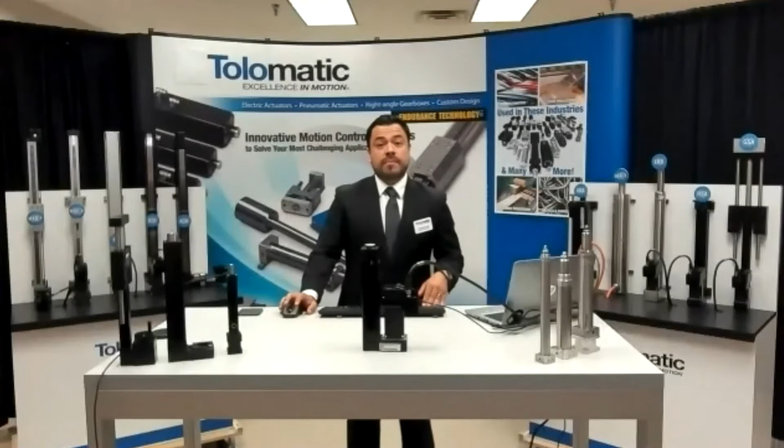Today we'll be presenting our Tolomatic Demo Studio. As you know very well by now, this sales environment is the toughest we've seen in decades. As sales or technical people, visiting a client in person, seeing an application live, looking at a machine running physically are all very essential components to understand the customer's needs.

In the last months, unfortunately, these options have not been available to us very often. Visiting a client in person nowadays is very challenging and sometimes not even allowed because of their policies. And the result of this is that business can suffer. The sales cycle increases, communication doesn't flow the same way, etc. And for this reason, we've had to rely on technology to keep us all connected.

This is taken from a book called Virtual Selling. It says, even though we know that an in-person meeting is more effective, the efficiency you gain by shifting initial meetings to video calls more than makes up for not being there face-to-face. You'll be able to meet with and qualify more prospects, resulting in bigger pipeline and more sales. Those are very true words.

And what a better way to do this than with a properly set up environment that you can utilize for this purpose. Being that a lot of our business is now done virtually—training sessions, webinars, presentations online—that's all we know nowadays. At Tolomatic, we understand the need to connect with your clients in a better way, and that's why we want you to put our demo studio to work.

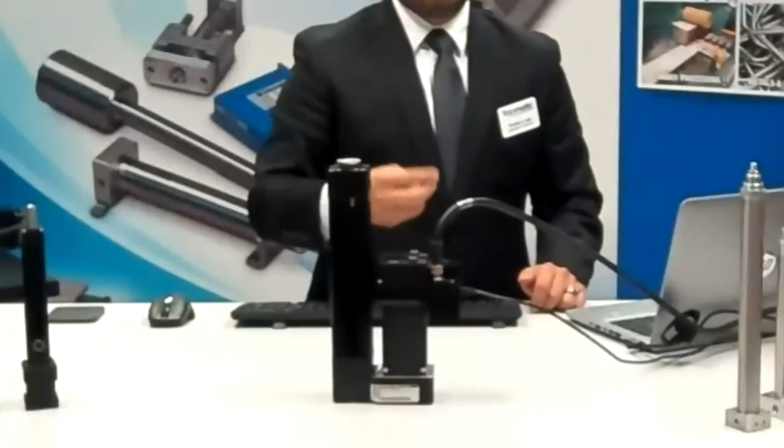This drive can allow you to communicate in different ways with a PLC. It could be done via Ethernet IP, Profinet, Modbus TCP, or EtherCAT. Besides that, you could also control it with analog or digital inputs, sending commands from a simple button, a PLC, an HMI, etc. This is connected to our RSA actuator, our rod style actuator, one of our most famous actuators we sell. So how would you show this to your customer? I'm going to start sharing my screen.

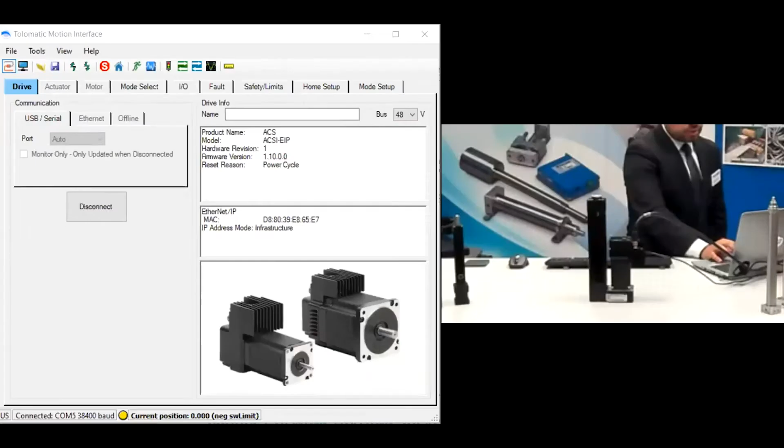We have a way to control this called Tolomatic Motion Interface. So your customer, once we have set up a meeting with you and your customer, should be able to control this via the Zoom meeting. So remotely, they can start moving all the different characteristics of this software.

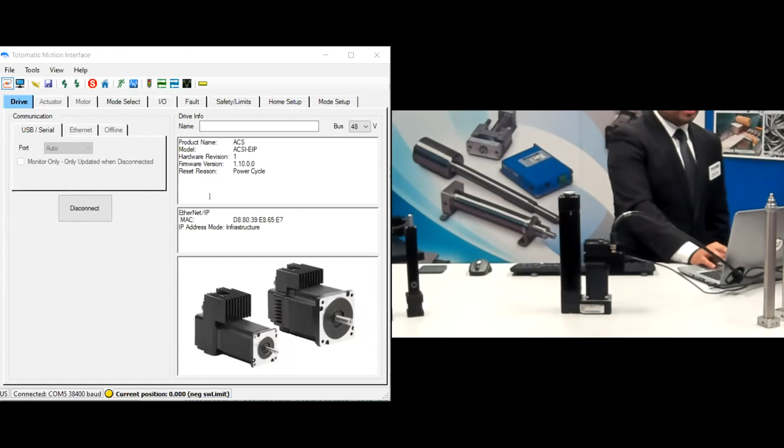For example, they would be able to connect, see what type of actuator and motor we have here. They should also be able to move within tabs so they can start configuring all the features of this actuator.

For example, in this case, we have an RSA actuator, size 24, with a solid nut 0.4. It has a 6-inch stroke length. It's mounted in a reverse parallel way, meaning the actuator is on this side and the reverse parallel goes to the motor, and everything is connected via a belt. It also has one of our ACSI motors, which is a NEMA 23 with an incremental encoder.

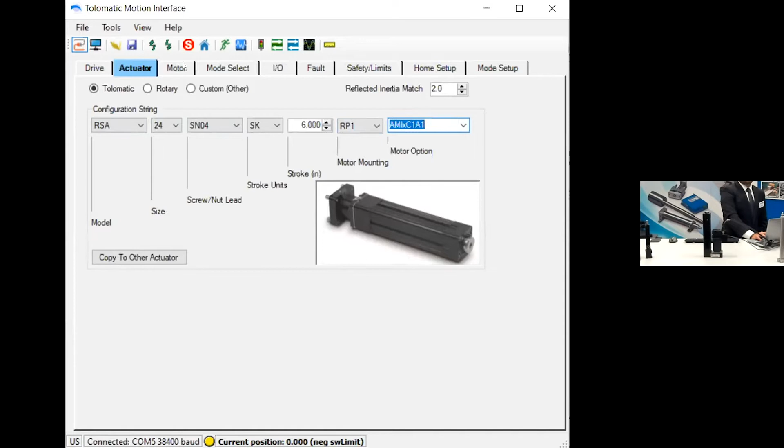Once we go through these steps, your customer will be able to see how easy it is to program one of our units. They can program index moves, an analog position move via 0 to 10 volts or 4 to 20 milliamps, or control it in a pneumatic way if they're replacing another pneumatic unit, using the same signals from an electrovalve. Instead of reprogramming all the PLC, they could use the same signals and just send 24-volt inputs to our drive. Or they can do it via a communication protocol, like Ethernet IP, Modbus TCP, Profinet, or EtherCAT.

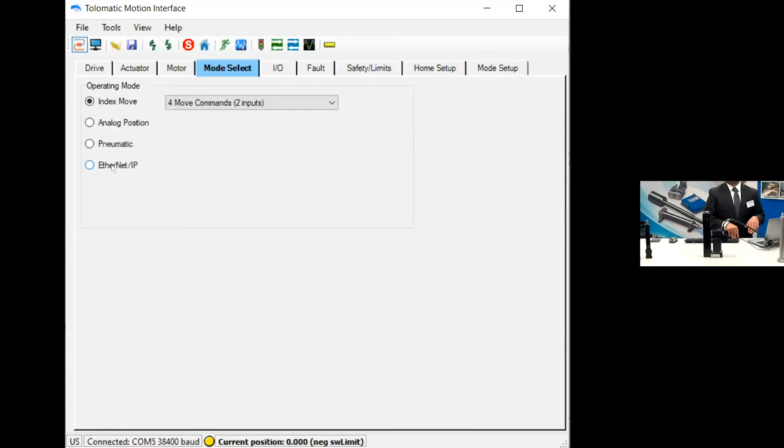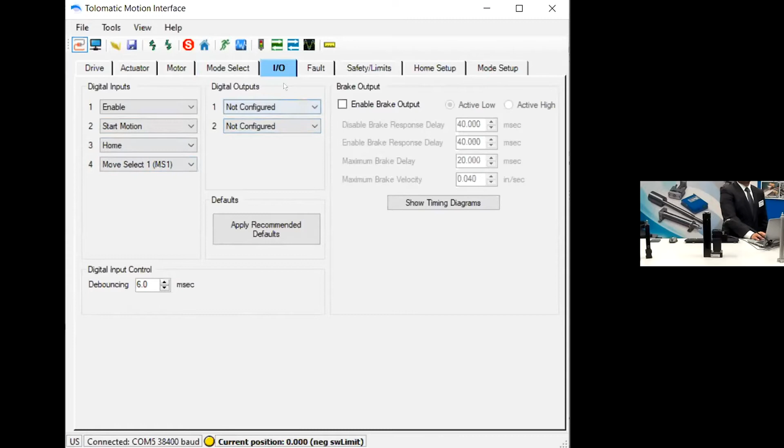In this case, for this example, we're just going to be doing our input and output index move. But you can define different inputs in this drive, like software stop, stop motion, limit switches, etc. These four inputs are what we're going to define today, just as an example. You can also set your fault values, what to do in case you get a position error, like stop motion, disable the motor, etc.

Then in our safety limits tab, you are able to define the tolerances in position criteria, a following error, the motion limits in terms of speed and acceleration, and your current limits. What is the peak current maximum, the continuous current maximum, and how long do you want the drive to stay in those values to throw or trigger a fault.

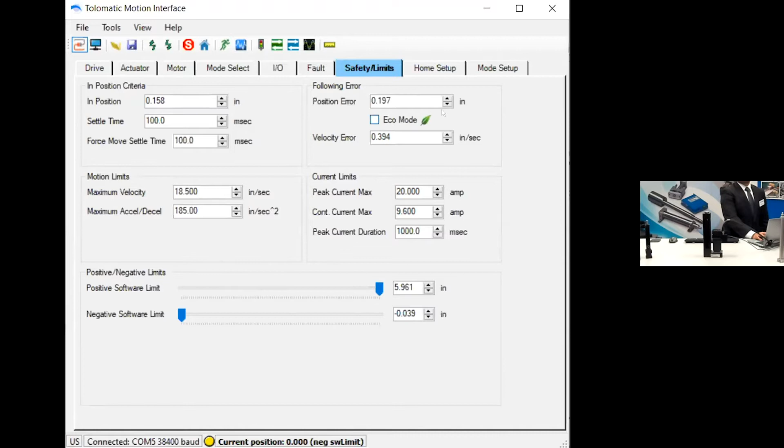Also, you can control the positive and negative limits of position. You can set up your home routine.

In this case, please take a look at this. When we press home, the actuator will go towards the end of stroke, and once it does that via this tab right here. The routine as of now is set up as a 0.5 inch per second speed towards the home. It has a 1 inch per second towards the offset, acceleration, deceleration, and offset, and the force.

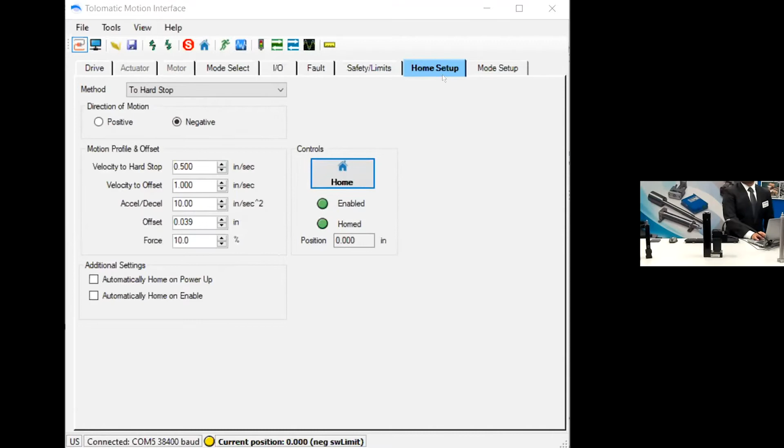And then, this is the most interesting tab, I would say. In this tab, you can show your customer that with an electric actuator, you're actually able to control different variables compared to a hydraulic or pneumatic product. In this case, we can control position, velocity, acceleration, deceleration, and force. It is as simple as modifying these values right here. We can modify position, etc., and then that way the customer remotely should be able to start creating motion.

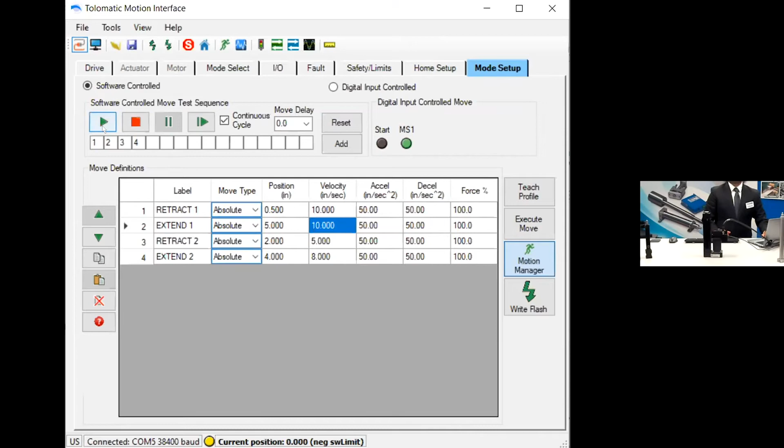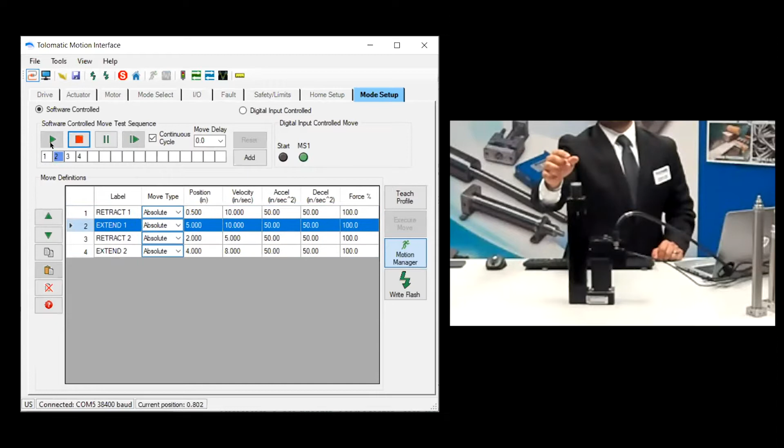In this case, compared to a pneumatic actuator that would have only 2 positions, an electric actuator is able to do different routines. As you can see, the extend goes to 5 inches with a certain velocity, acceleration, deceleration, but the way back can go slower, can go faster, whatever you prefer. So that's one of the main advantages of using an electric actuator. And it's way easier to show this to your customer by actually having them see it in a video, and not only that, but they were the ones that programmed it.

So this software is really, really simple to use. As you saw, we took probably a couple minutes right now in this example, but in real life it really takes about 5 minutes to do it. You can always rely on your Tolomatic support to do this, but it should be pretty simple. All right, so that's our ACSI motor drive combination with our RSA product.

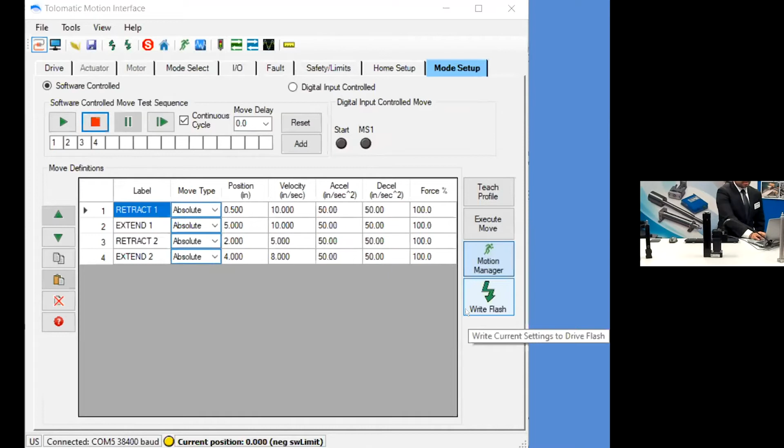So I also wanted to show you some of our other demos we have available right now. Now that you know that we have a studio and we can present stuff to your clients like this, what do we have available out there? If you go to our website, there's a section that will show all of this.

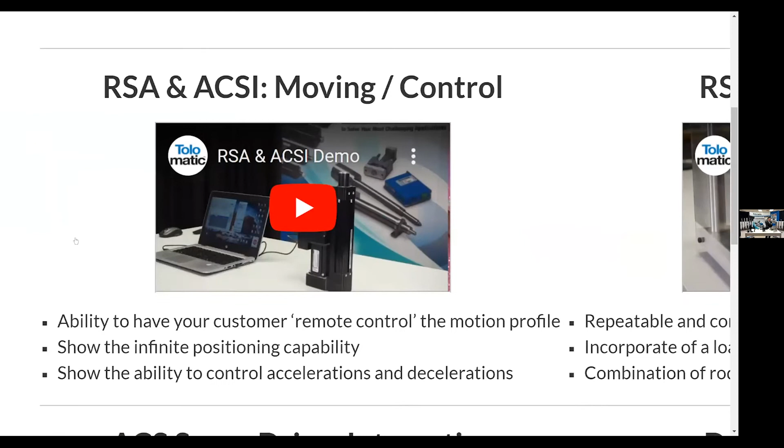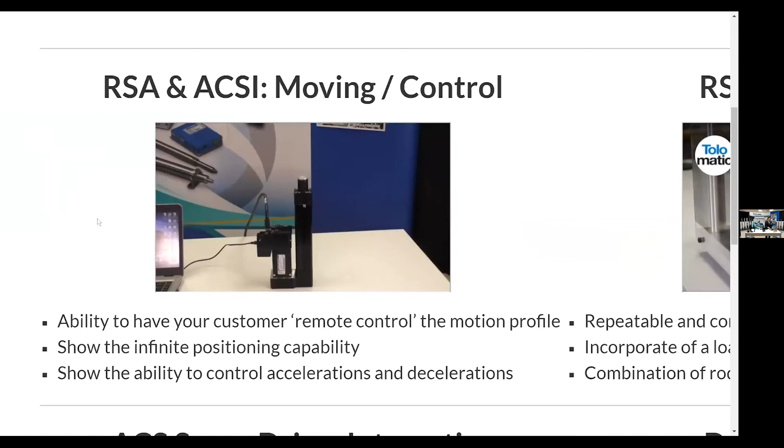In this case, you can select the one that I just showed you, which is our RSA with an ACSI. The main things to consider on this one is that you can do remote control. You can show infinite positioning to your clients, and you can show the ability to control accels, decels, force, etc.

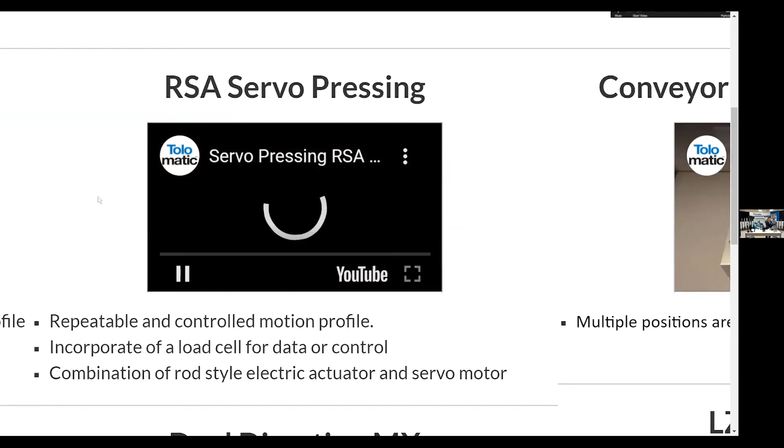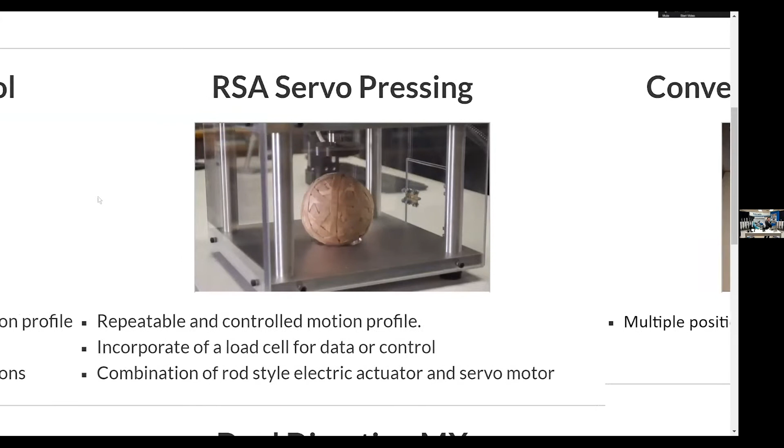We have other ones too. You can do an RSA servo pressing. This is a demo that we use to show how repeatable and how controlled the motion profile can be. A lot of clients have applications that they have to repeat within a certain percentage, 2 or 3% repeatability. And this demo shows that it gets to the same position every time, and not only that, but it also does it with the same force every time. Obviously it has a certain percentage of repeatability, but electric actuators are really good for that.

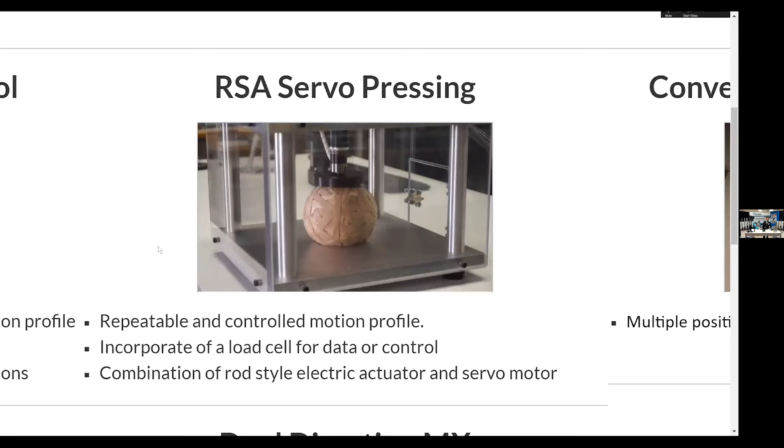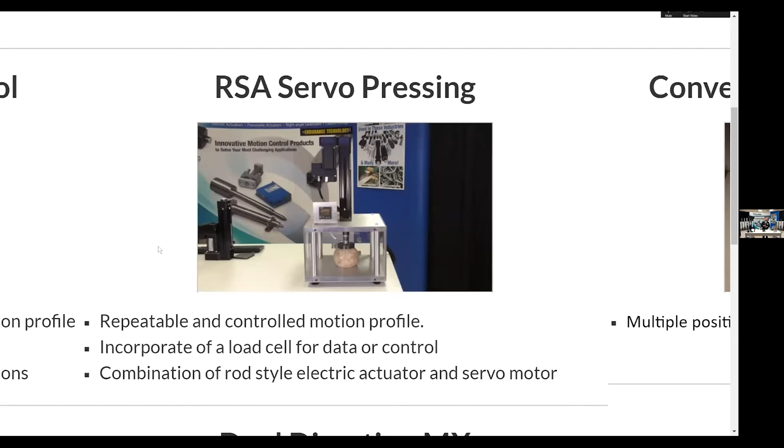Also, in this demo we actually included a load cell. This load cell gives an input to the drive that's used as a feedback to know how much force you're developing in the system. So this combination of the rod-style electric actuator and the servo motor is great for a lot of people.

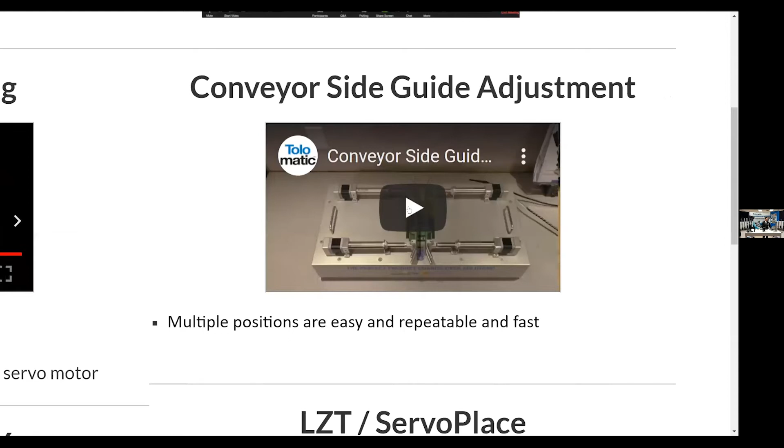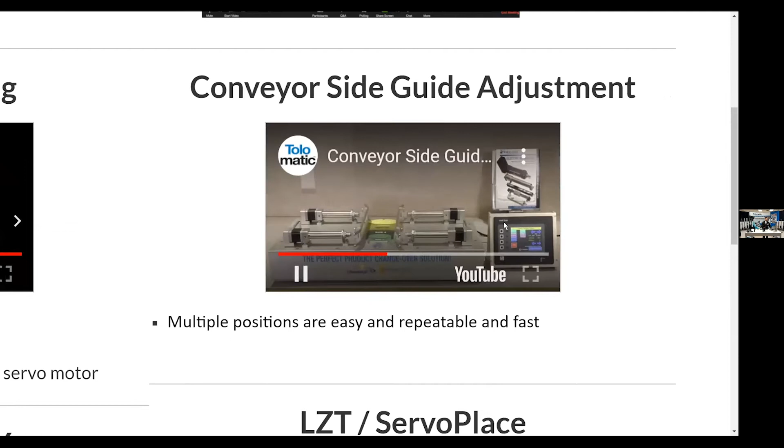All right, the other one we have is this pneumatic replacement actuator setup. Basically what this is doing is that 4 actuators are moving synchronously via signals sent to them by the HMI. This is all controlled via Modbus.

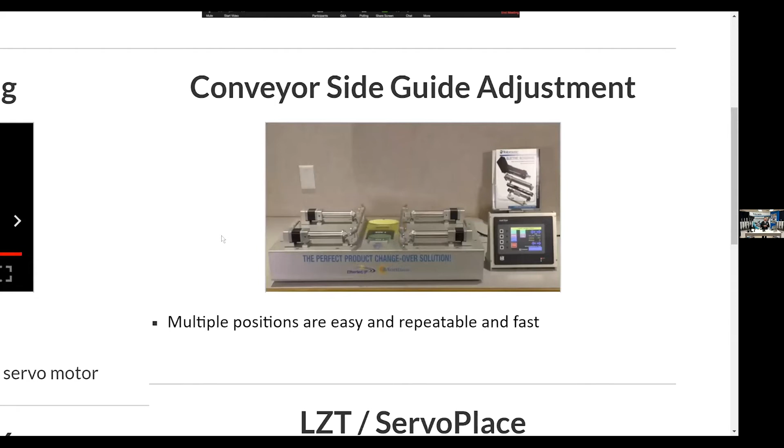The way it's done is we have predefined recipes for creating a motion profile that could be used in an industrial setup. The main use case we've seen is when people are trying to make changes in their production lines. For example, manufacturing companies spend a lot of hours on preventative and corrective maintenance because they need to adjust the conveyor for the size of the product they're manufacturing. With pneumatic actuators, that's pretty difficult to do because everything is mechanically done.

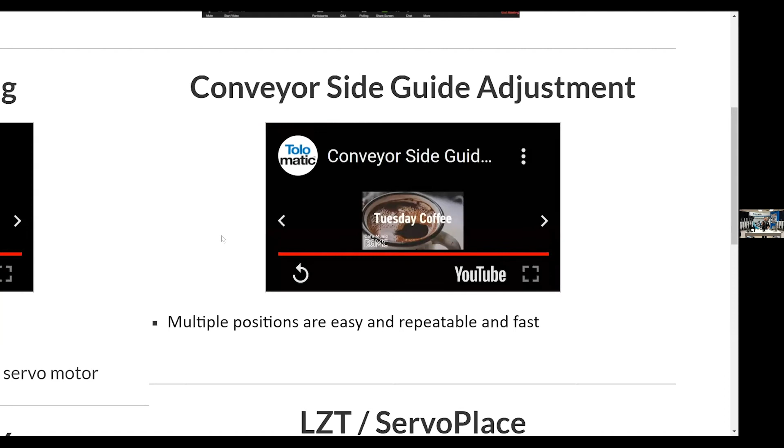With an electric actuator, you can just press a button, as you're seeing in the video, and it has a predefined recipe with the force, accelerations, etc. that you want, and that's pretty much what you need to do. So you eliminate downtimes, and the return on investment is pretty quick.

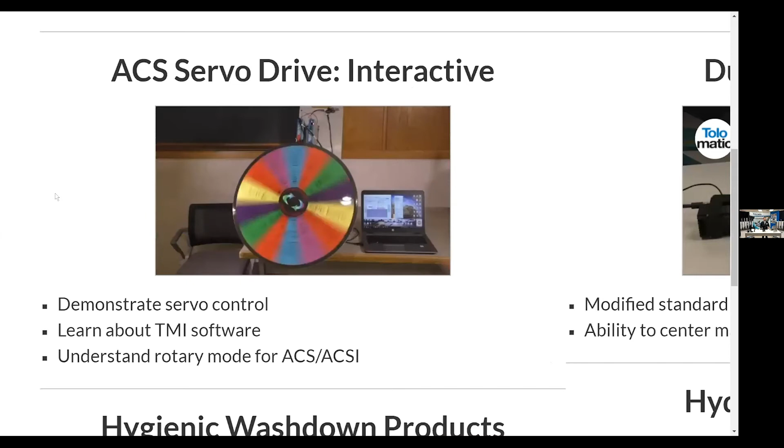We also have some fun ones. This one in particular is our ACS servo drive. What it's doing here, instead of controlling a linear position, it's actually controlling a rotational position. We also have that capability of doing degrees or revolutions. Well, this demo is basically just a wheel of fortune.

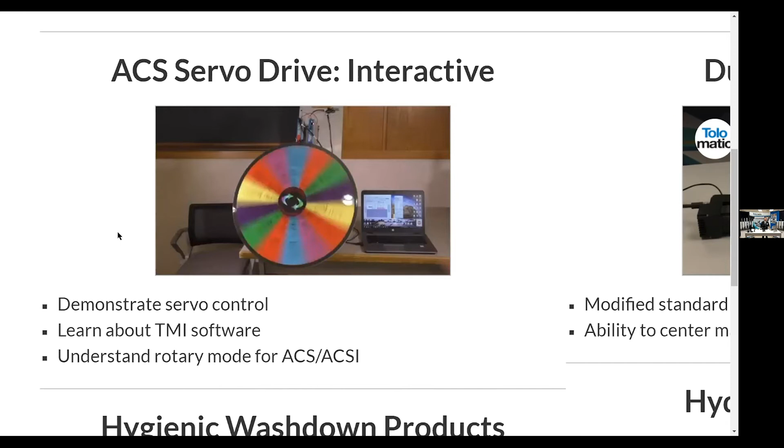So you select a random number of degrees, and it rotates into a position that gives you a certain prize. It could be Tolomatic gear or whatever — we can define that when it comes to the time. But basically it's to show the capability of the ACS drives to be controlled via a rotary mode. So yeah, this is a real wheel of fortune. If you wanted to schedule a meeting with your clients, they will actually get real prizes. So that's one of them.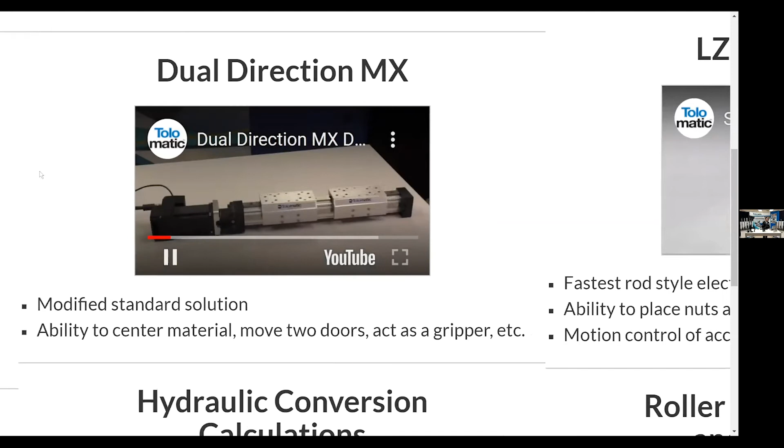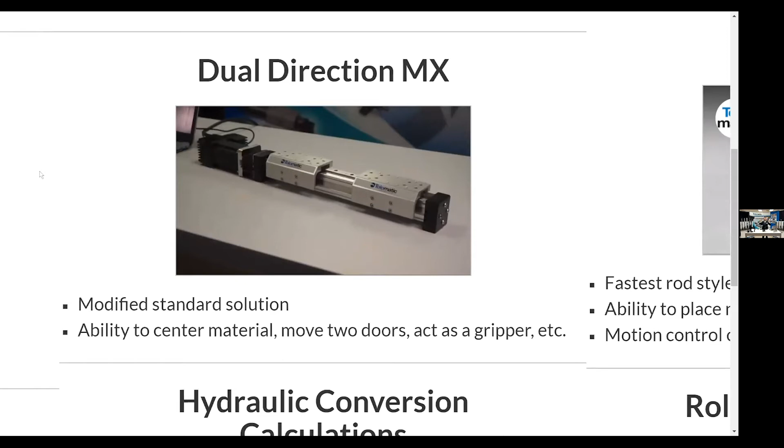We also have this dual direction MX. A lot of people find it really interesting. What it's doing here is using 2 screws — well, it's the same screw, but with different threads. One is a left thread and the other is a right thread, and they're joined in the middle. When the screw is rotated, one of the carriers goes to one side and the other goes in the opposite direction. So with the same motor, you can control 2 carriers at the same time, and they act as a mirror.

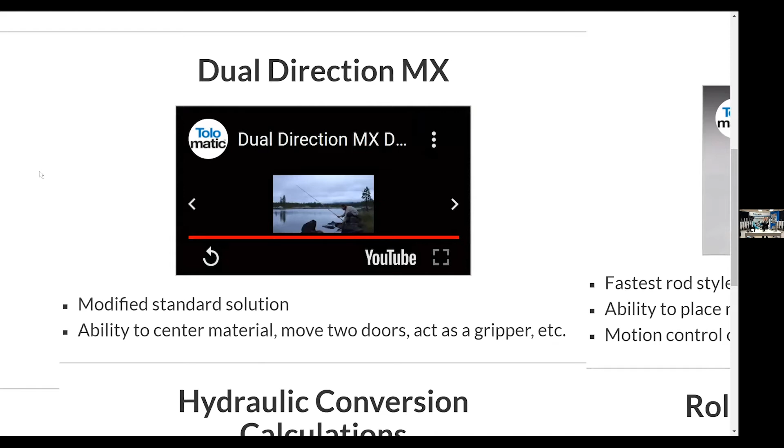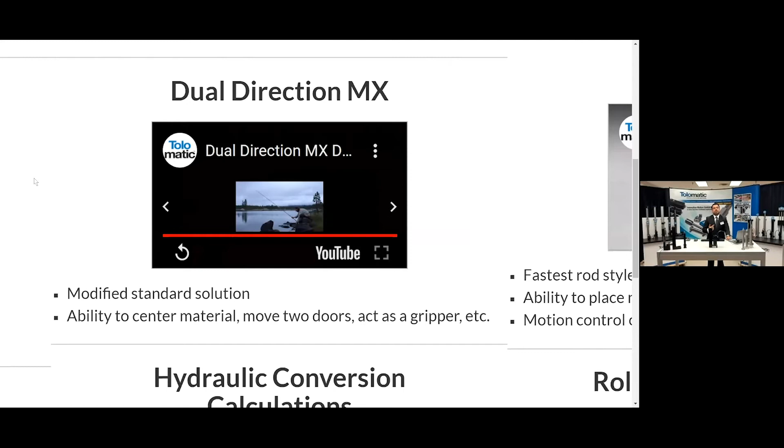That's used a lot in gripping applications, for example when you want to grip something like this and then transport it to another location. This is a really good demo to show that kind of capability. These are used in pick and place, and in operations that need to press or compress something — you name it. There are many applications.

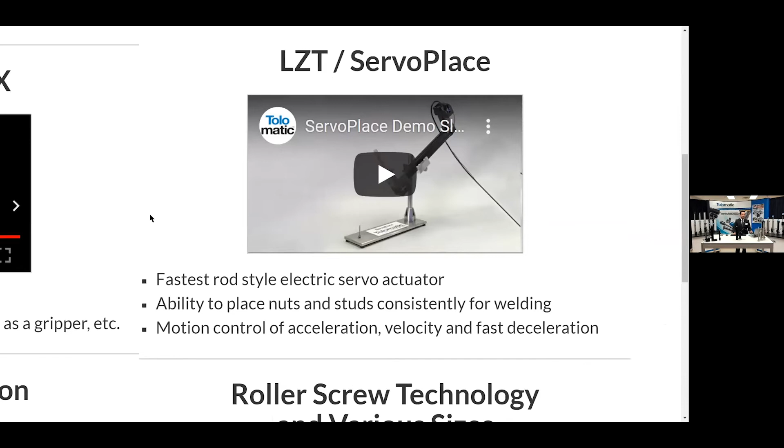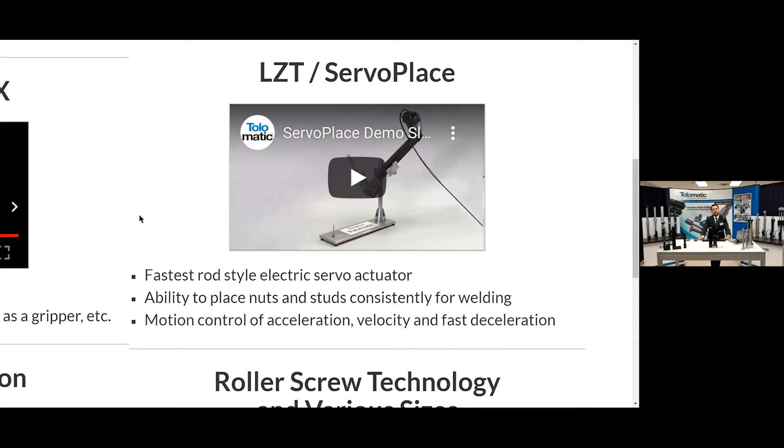This is our LZT, or ServoPlace — definitely our fastest rod-style actuator out there. These can move up to 200 inches per second, or 5 meters per second. This is a combination between a belt-driven actuator and a rod-style actuator, which isn't very common to hear. Instead of rotating a screw, we're actually controlling the movement of the rod with a belt, and that's what gives us more speed capability.

This, in particular, was designed to place nuts for a welding application in the automotive industry, but we've seen other projects that might get good use of this. As you can see in the video, it moves extremely fast — we needed to slow it down so you could see the rod moving. But it's been pretty interesting for a lot of customers.

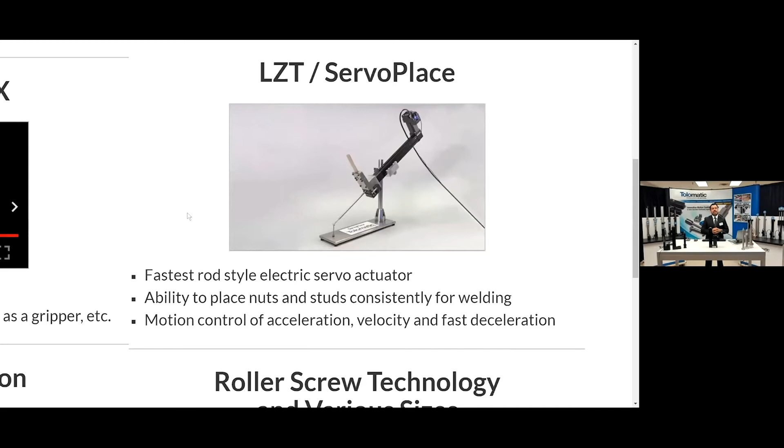The main reason is this was also done pneumatically back in the day, and it's still being done pneumatically in many places. But the problem with pneumatics is that you have different pressures in the lines, and by having these variations you don't get to the same position every time, or not at the rate you'd like — there are variations of pressure and velocity, etc.

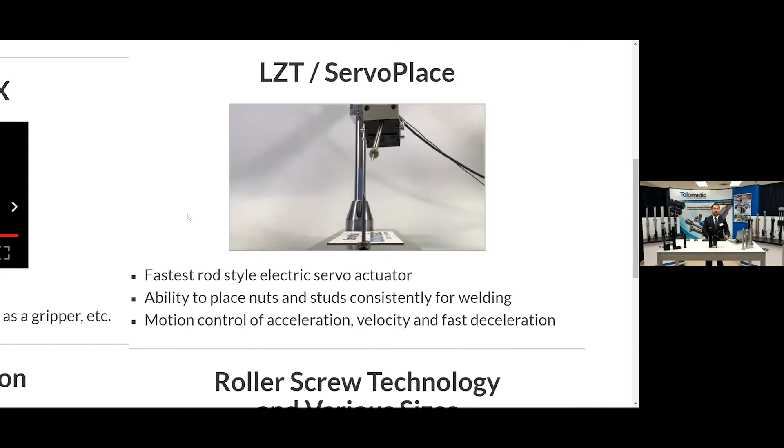So those nuts that you see the rod placing were all over the floor, meaning operators needed to clean them up. That's downtime an automotive company cannot afford — stopping for 1 hour in that type of industry is a lot of money. So we don't drop any nuts with this thing. It gets to the same position every time, locates it where it needs to go, and does it very efficiently. So we can show that to your customers as well.

We have our hygienic washdown products with water and movement. In the last decades, there wasn't really any hygienic solution out there other than pneumatic — because hydraulic is not hygienic, right?

It uses oil to operate, so oil is not hygienic at all. Nobody wants their food with hydraulic fluid in it. So pneumatic was the best approach before, but the problem is you have all the losses of efficiency because you have leaks of air, etc.

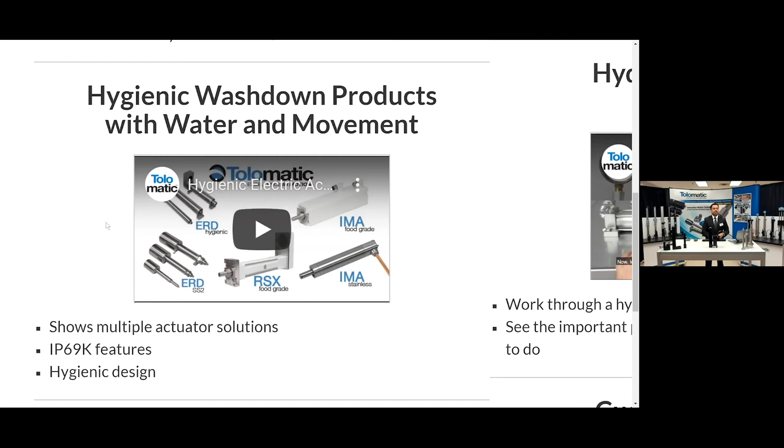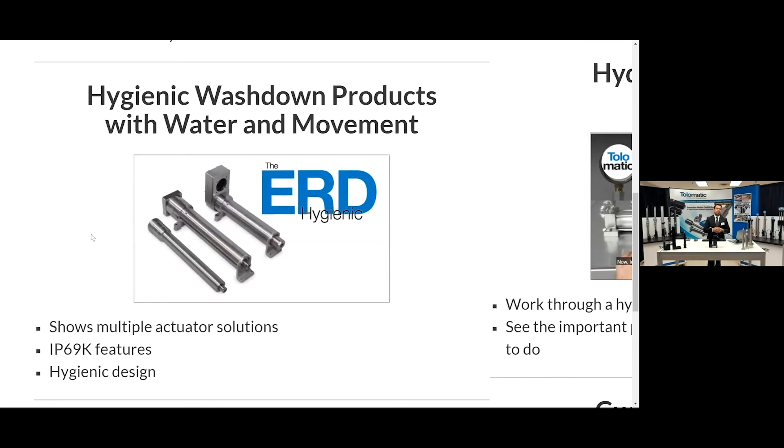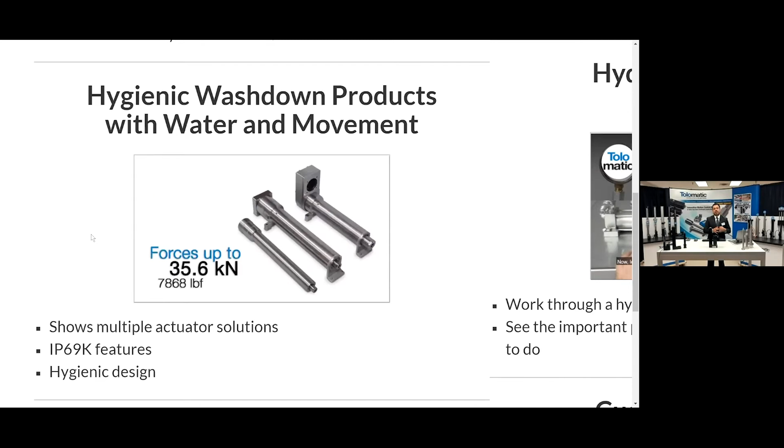So we heard that from our customers, and we designed a bunch of actuators that are actually hygienic. These actuators can be either stainless steel or have a white epoxy paint, so you're able to clean them inside and have a really hygienic operation. They're rated, some of them at IP69K, which means you can power wash them at high temperatures, high pressures, statically, and they would withstand the ingress.

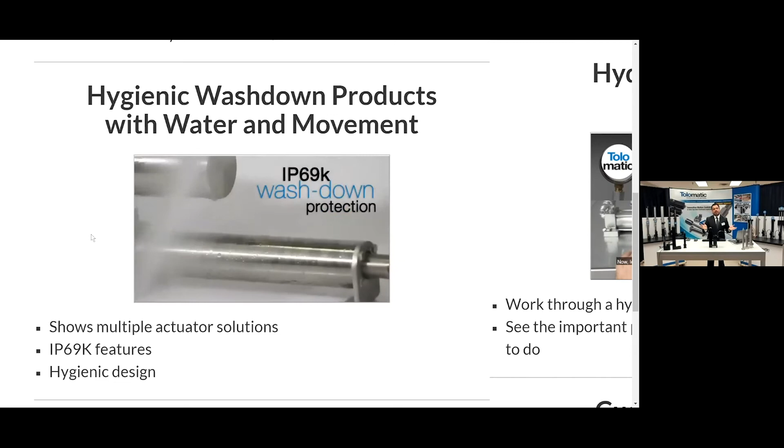So as you can see in that video, you can wash them and they will not get water inside of them. Besides that, they could also have the lubrication that is special for food and beverage or pharmaceutical. We can also include one of our motors in the back.

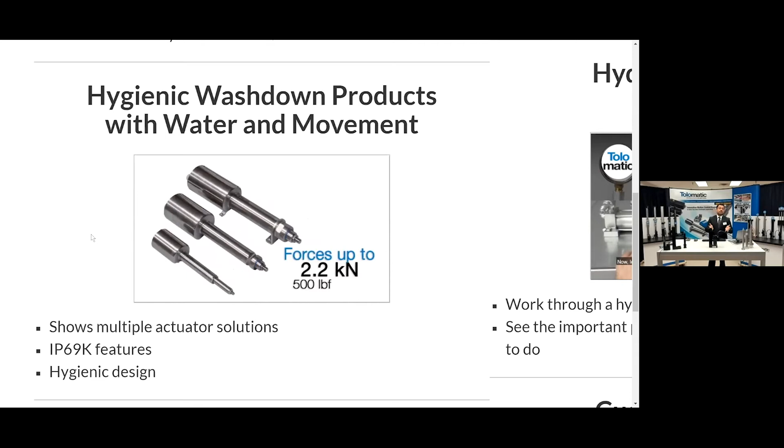So those NEMA 17 or NEMA 23 motors in the back could be servo motors or stepper motors, and they're all surrounded by this can that it's also rated IP69K. So you have the whole solution and then just a cable that goes to the drive, and that drive can be put somewhere else in your control panel.

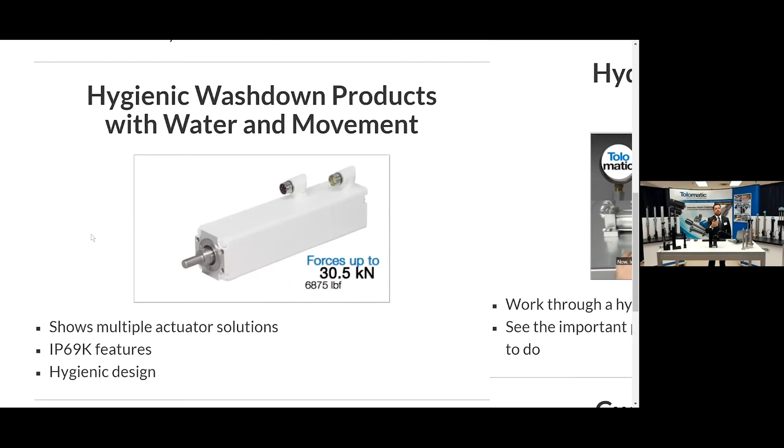Also, this IMA has the motor integrated into it. The motor is in the first 30%, probably in the back, and then the remainder is just the mechanical piece. So you can have this solution with the motor integrated, and it has this white epoxy paint, so it remains hygienic enough.

And this one, that no one else in the world has, Tolomatic is the only one that offers this. It's an integrated motor into the actuator as well, but it's also IP69K, and it's all made of stainless steel. So this is our IMA stainless steel, pretty cool product.

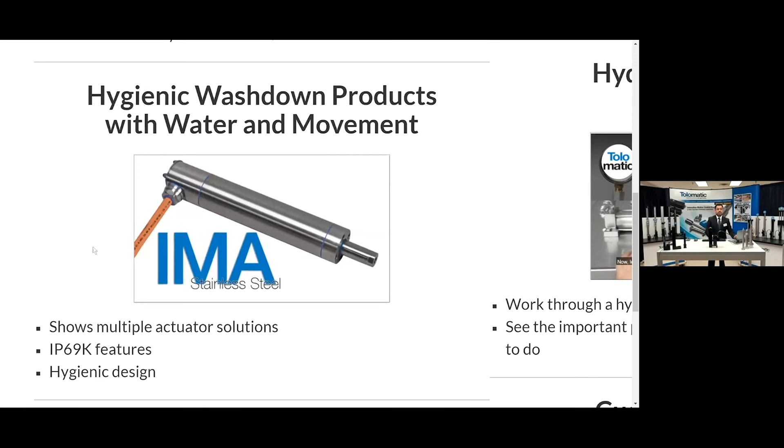As you can see in the back, it just has one cable that could stick out in the back, and that's what you use to send it to your PLC and your drive. So that's as easy as it gets.

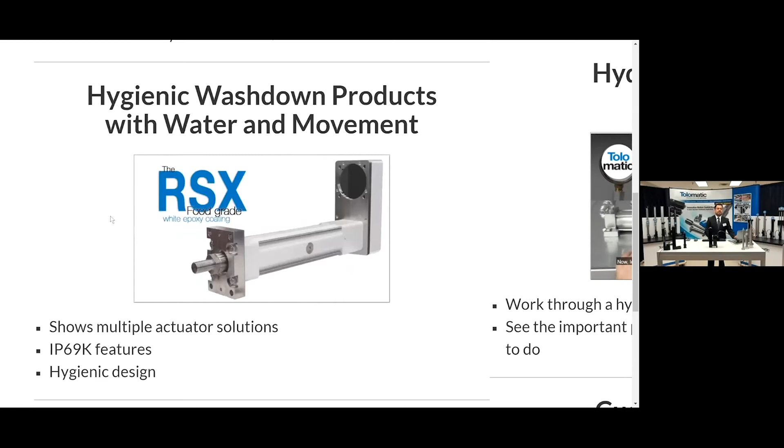And then the RSX, which is for extreme forces. This type of actuator is replacing hydraulics. A lot of people out there use hydraulics for high force applications. But the problem is that if you have a food application, beverage, pharmaceutical, you cannot leak any oil in there. And it's not a matter of if the hydraulic solution will leak, it will leak. It's just a matter of when.

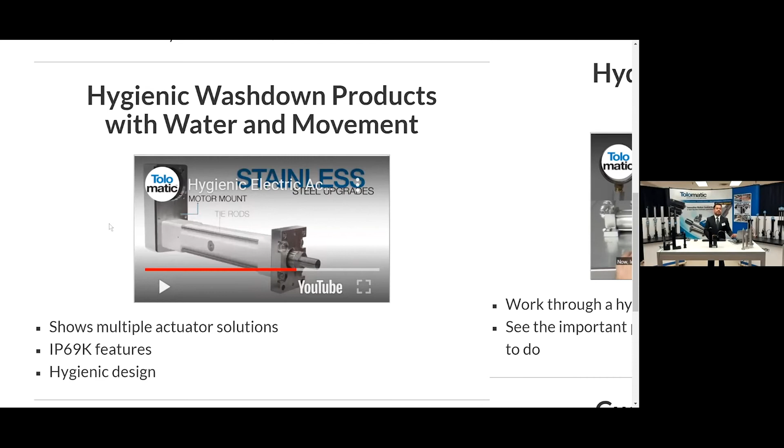So that's why in recent decades, there was nothing out there that could replace hydraulics like that. But now we have it. It's this RSX hygienic. It can go to 40,000 pounds of force. We're working on higher forces even, but it has stainless steel components around it. So it's a pretty good solution for some applications.

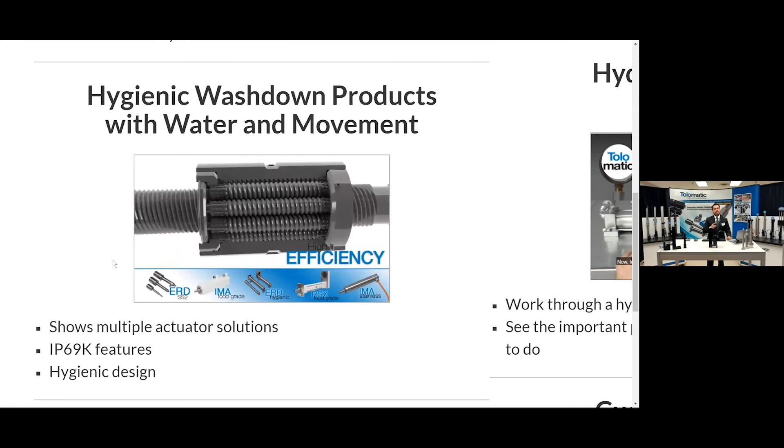And the backbone of all of these things to replace high forces is this thing you're seeing on the screen, the roller screw. There's just a couple companies in the world, probably 5 or 6, that can make this type of machining with roller screws, and Tolomatic is one of them. This contact that these roller nuts have with the screw creates that extreme force.

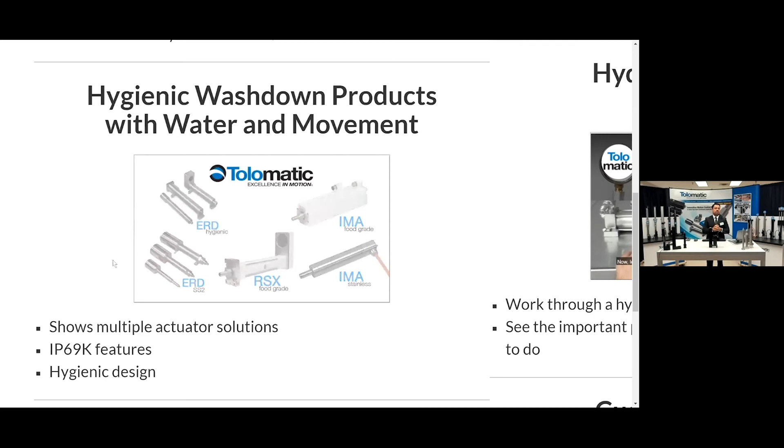We can put them in basically all of our products you see there. So you can achieve high forces while also being hygienic, wash down and stainless steel.

Not only do we have the hydraulic conversion in hygienic setups, we also have it in normal setups. Instead of using your normal hydraulic conversion, we have demos that can help show your customer how to convert from hydraulic to electric.

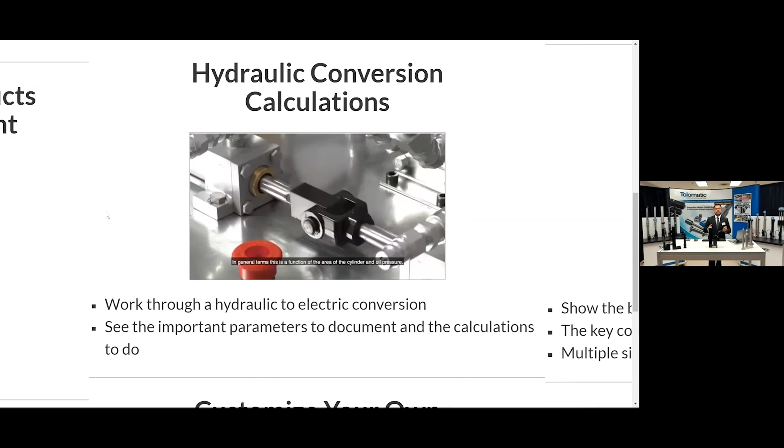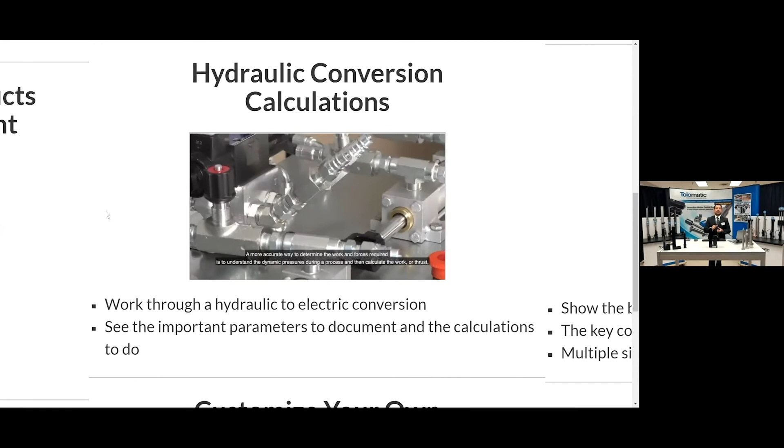This demo is basically creating some resistance with some hydraulic actuators there. And what we're doing is measuring the pressure that happens when you extend or retract a hydraulic rod. By measuring the pressures, by knowing the bore size you have in the cylinder, and by knowing the diameter of the rod, we can very easily calculate how much actual force is being developed in an application.

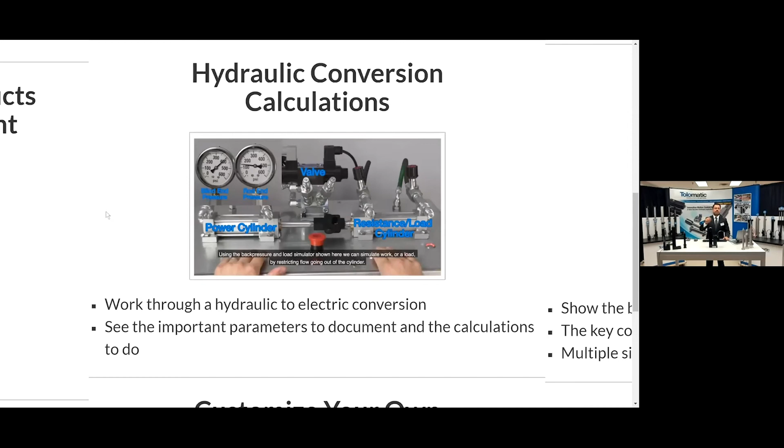The issue with hydraulic systems, as you may know, is that you size them higher many times than the actual force you need. The reason is because you lose efficiency by transporting the oil or hydraulic fluid in the pipelines, and by losing that much efficiency, you develop less force at the end. So a lot of people just calculate it by multiplying the pressure by the bore size, and that's it. But unfortunately, that's not really a real number that we get out of that.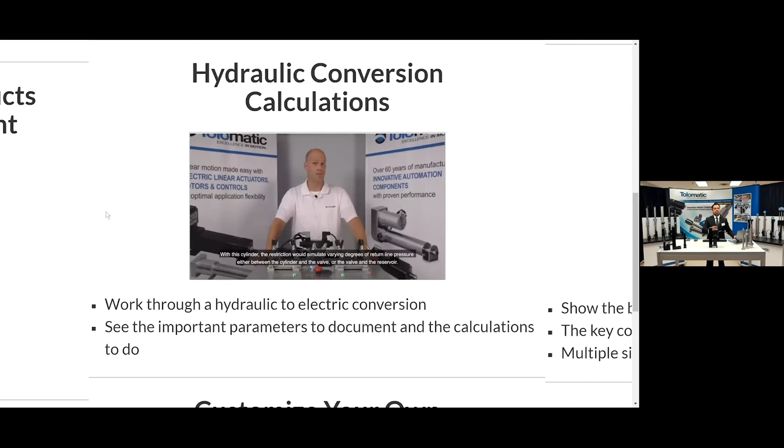So we showed this demo to show the right way to calculate hydraulic forces and how to convert that to our electric actuators.

Another demo we have is our roller screws. Compared to the most common ball nuts, instead of having just a sphere connecting to a screw, these actually have a triangular shape. That's what touches the main screw. By having a triangular shape, it has more points of contact, and by having more points of contact, you can develop way more force than a ball nut.

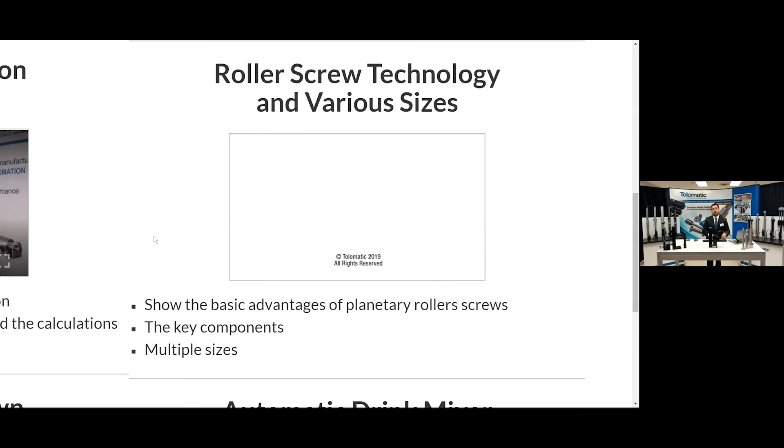So we can also show all these sizes that we have of roller screws. We're developing this type of technology at a fast pace, and as I mentioned before, there's not a lot of companies out there that have this type of technology available. So we have a really short lead time as well, because we make them here in the US, Tolomatic in Minnesota.

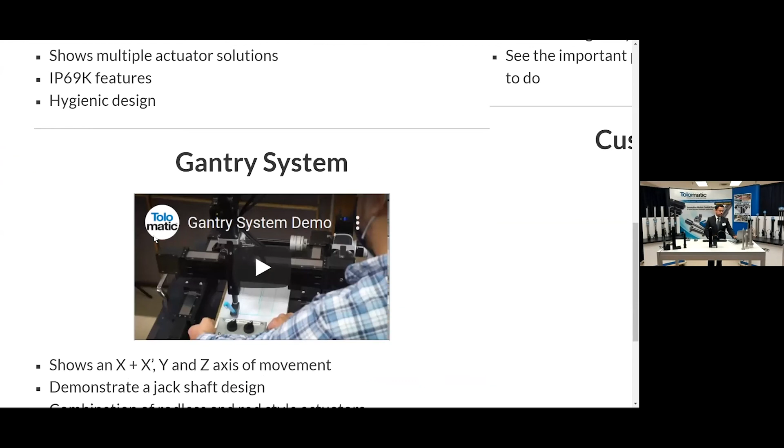We make them right here, so we have a pretty good lead time on those. All right, and then also we have a demo to show our gantry systems. This is becoming really, really popular among people now that they know they can control a system in a better way with electric motion. They are really hitting the deck here at Tolomatic. We're sizing a lot of gantry systems right now.

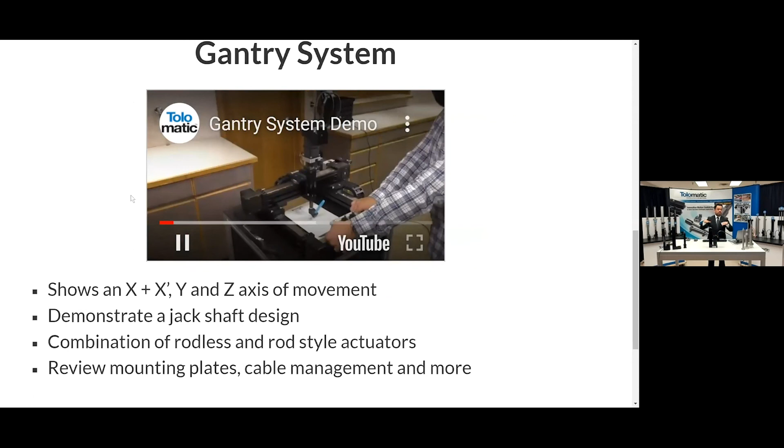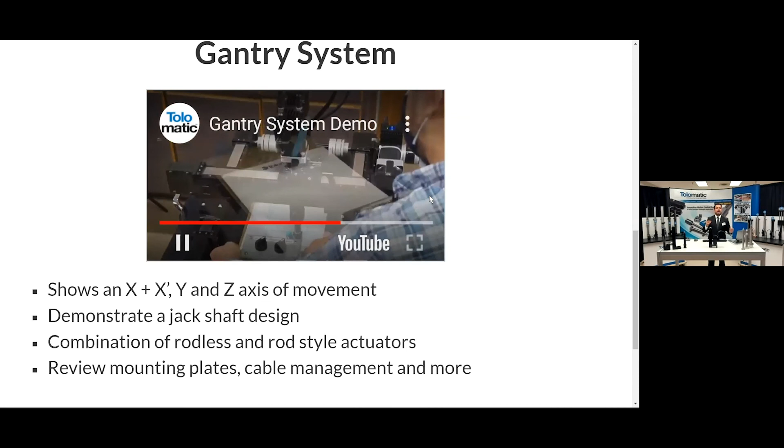So basically, the demo that you see here is the combination of a rod style and rodless actuators. That's me in my best attempt to draw with this thing, but you actually change the inputs, analog inputs, 4 to 20 milliamps. And by changing with a couple of potentiometers, you are able to move the x-axis and the y-axis, and that way you're able to draw something in there.

What this demo is constructed of is an x-axis and its little brother, which is an x prime. The x-axis is controlled by one motor and a gearhead, and that creates the rotational motion, and the transfer of movement from the x-axis to the x prime axis is done via a jack shaft and a couple couplers. So that way they're perfectly synchronized. You don't have any move that is not synchronized that could damage the whole system. It's perfectly synchronized in the x-axis.

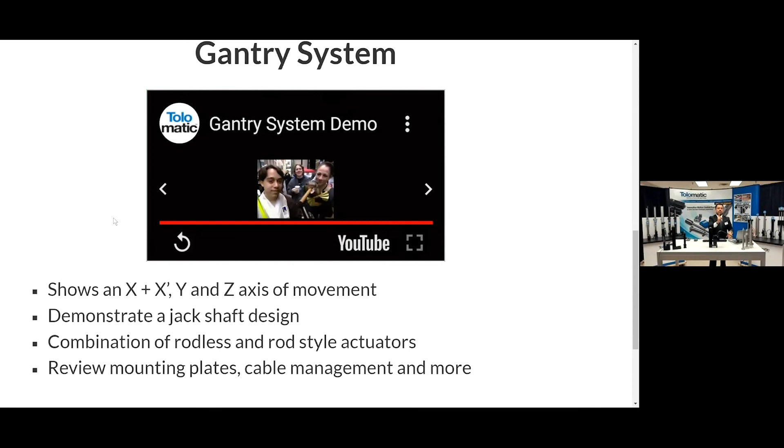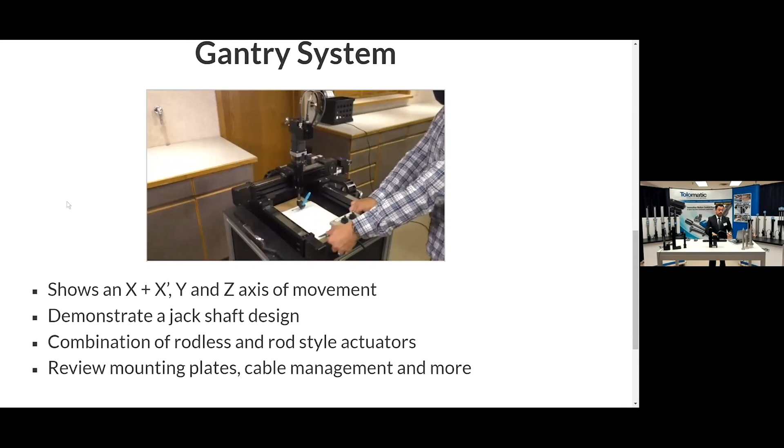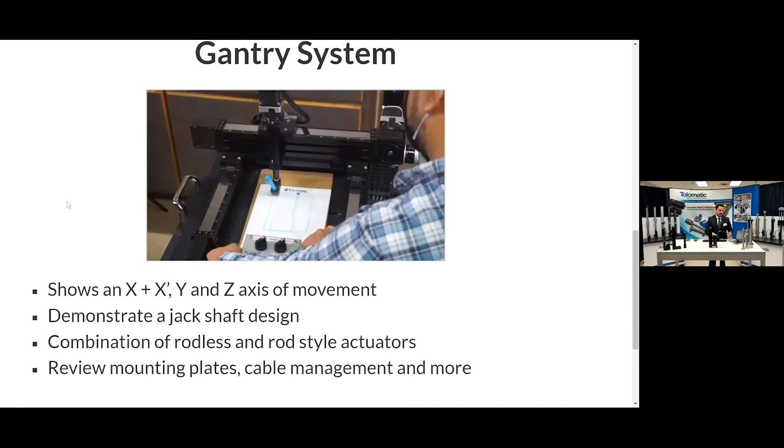And then the y-axis is controlled by a secondary motor and drive, so it moves in this direction. And then vertically, we have our rod style actuator, the RSA, with one of our ACSI motors. As I mentioned before, this motion is done via analog inputs, so it's relatively easy to control if you're used to how the panel works. But you can challenge your clients to create some type of shape on the paper.

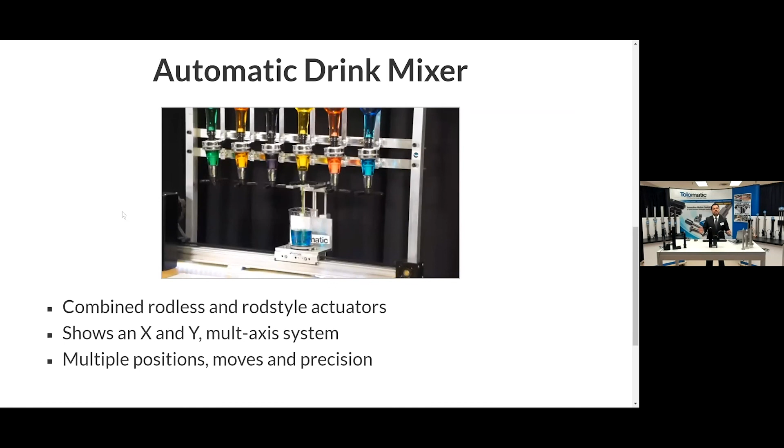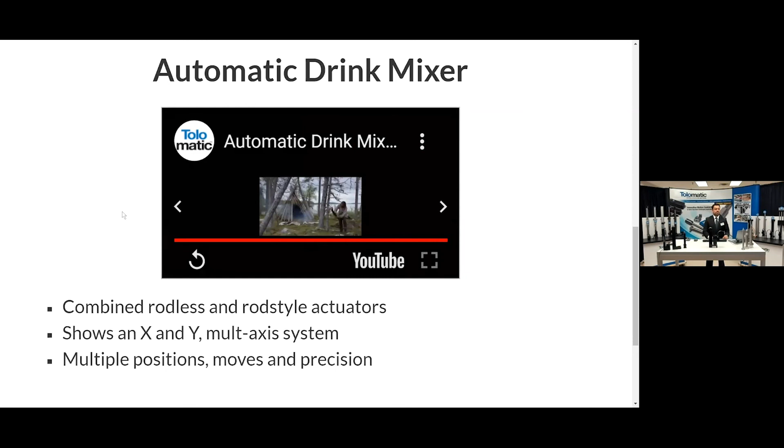We'll put it in every bar in the US pretty soon here. So as you can see, everything is controlled via an HMI, and this communication is Modbus TCP. The Modbus TCP sends a command to locate the rodless actuator in a certain location, and then it tells, all right, I'm done, I'm in position. And then the ERD, which is the vertical axis, says, all right, you're done, then it's my turn. So they're just communicating between each other. And then at the end, you have your drink ready to go.

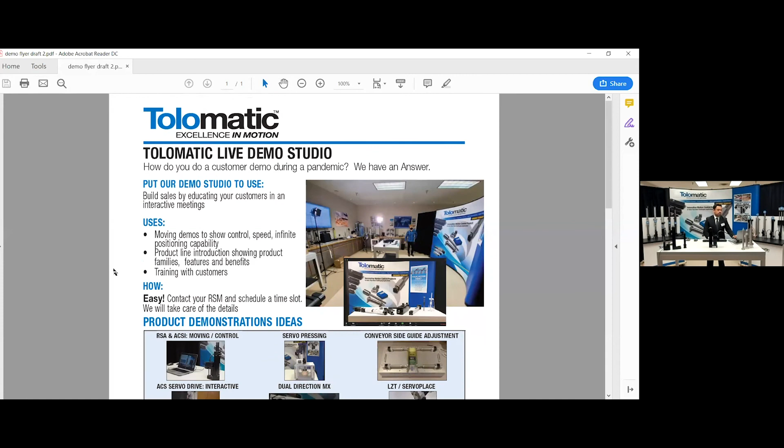In terms of how to schedule this and start showing this stuff to your clients, we have a couple resources online. As you saw that website, you can show a couple videos to your customers, select the demo you want to show. But we also have this flyer that we're going to start distributing amongst you, and it shows the current demos we have right now.

And you know, this is open, right? We're always thinking about what's a good demo to demonstrate a certain application, so we're always trying to think of new ideas. At the moment, these are the ones that we have available, but certainly we can talk again and talk up different ideas. So yeah, these demos are available. You can just start talking to your RSM, send this flyer to your customers, talk to your RSM, and just start making motion and make the sale.